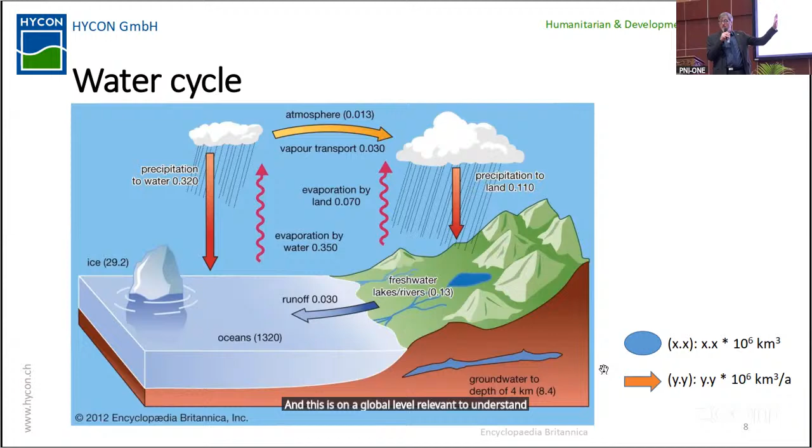Now, talking of climate change, I just want to give you an example from Switzerland, to show you the relevance of climate change on river runoff, and therefore the consequences for hydropower or hydroelectric production. What you see here are potential climate change scenarios on the temperature, depending on which model you take. And you see how the curves go up in relation to the CO2 emission equivalents, and the temperature change depending on the model.

So from models with an increase of temperature of 1.5 degrees Celsius up to 4 degrees Celsius on a global level. These are the different climate change scenarios which we have. Next slide.

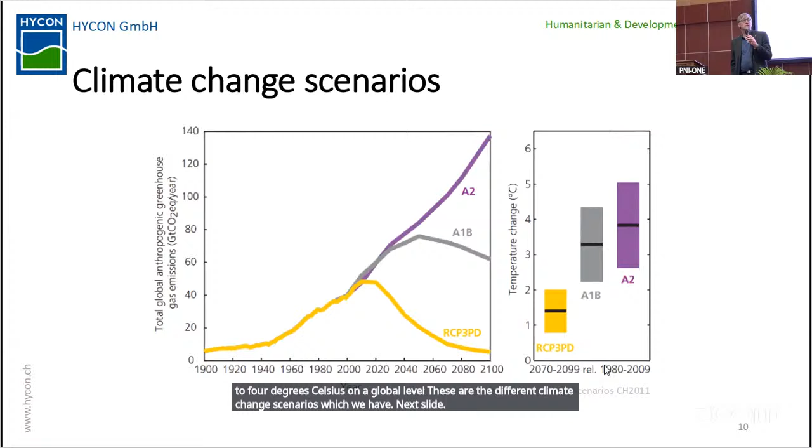And this is what happens with the river runoff. What you see here is the thick black line. This is a normal river runoff in Switzerland. Normally we have a low runoff in winter, January, February, and also towards the end of the year, and a high runoff in summer. Now, what happens when climate change comes into play? We will need to assume a shift where we have much drier summers. You see all the lines come down in the summertime. So we have drier summers and much more water in winter.

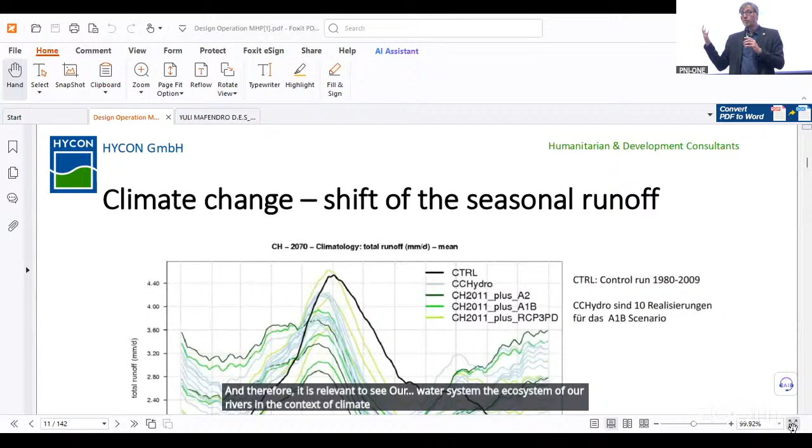Now, Switzerland has the challenge that we have cold winters and warm summers. Our farmers can only produce food in summertime; there are no crops in winter. So we have only the period from March, April to October to harvest our crops. And if we have much less water in summer due to climate change, we also have an irrigation problem because the water is not there anymore. So this is a real impact of climate change on river runoff. Therefore, it is relevant to look again at our water system, the ecosystem of our rivers, in the context of climate change, and to derive consequences for hydropower production. Next slide.

And these are the consequences for hydropower generation. We will have less water available in summer, so we can produce less hydroelectric power in summer because we have less water in the rivers. But we might have more water in the winter time in our rivers. And you see here the energy statistics for Switzerland. Switzerland has about 60% hydropower and 30% nuclear power, meaning that we might produce a little bit more hydroelectric power in winter, but definitely less in summer. Next slide.

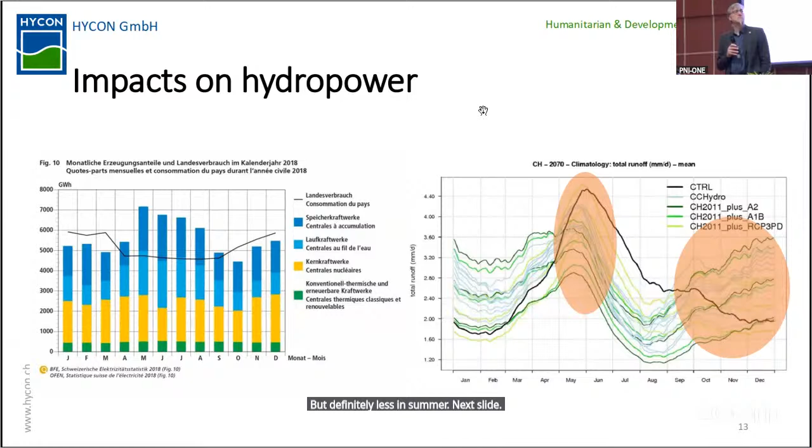Interesting, and I think this is also worth mentioning when I look on the transition to renewable energy, which is also one of the major goals for Indonesia. We always say that renewable energy, and I'm talking now mainly of solar and wind power, is fluctuating very much. So you never know, is there a lot of PV electricity, or is there a lot of wind, or is there less?

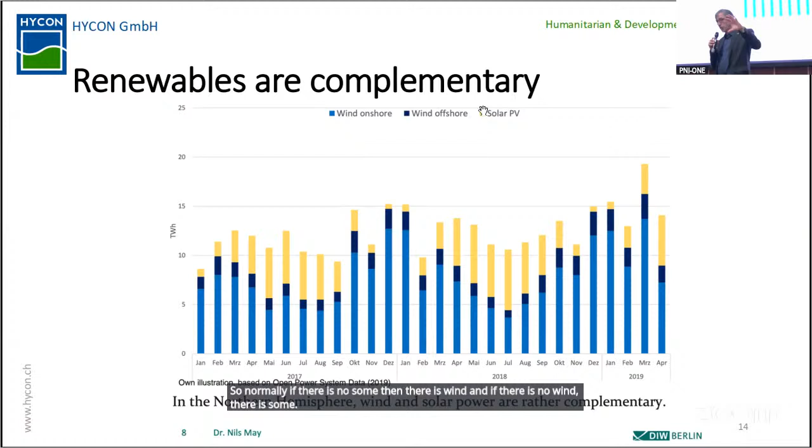A German institute has made a long-term study, and what you see is that solar and wind are actually complementary. So normally if there is no sun, then there is wind, and if there is no wind, then there is sun. So if you look on a long-term average, you see that you have, with the combination of solar and wind, more or less a constant yield of renewable energy. Next slide.

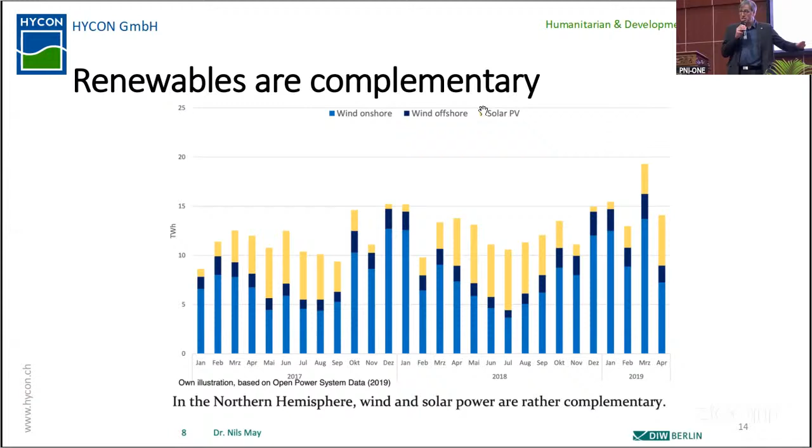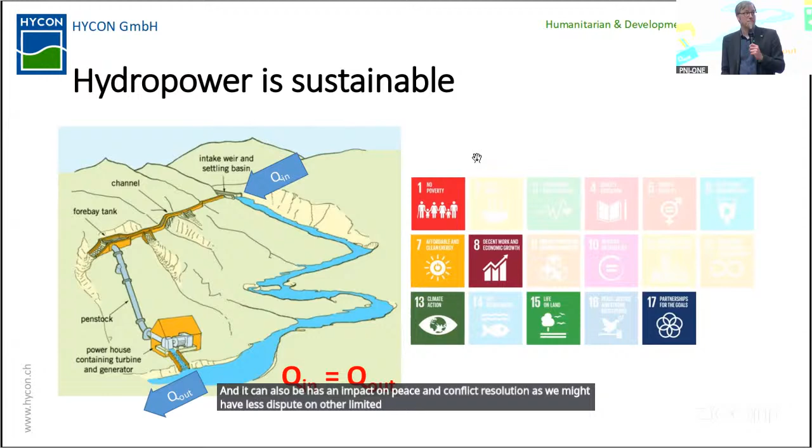As it helps further in transitioning to renewable energy, we definitely have a positive impact on climate change. We have a positive impact on life on land. And it can also have an impact on peace and conflict resolution, as we might have fewer disputes over other limited resources. Next slide. Next.

Further, we need to purchase equipment and materials. And let me add that here in Indonesia, we have a very vibrant sector for renewable energy, for hydropower plants. We have a lot of companies providing components for small hydropower plants, be it turbine manufacturers, be it electrical engineering companies, etc., who provide this equipment. So here we already have an industry in Indonesia which can provide the required components, and therefore by installing new hydropower plants, we can also benefit from our existing industry here without the need of importing goods or services from abroad.

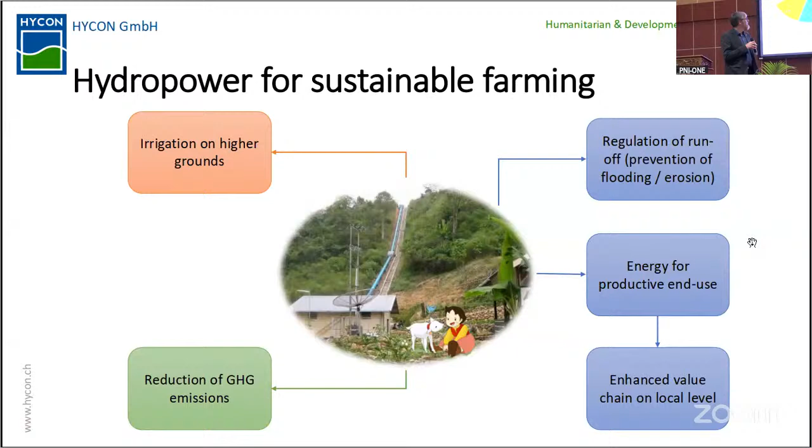And this is very interesting, actually. This is the value chain from farming, and you see that with electricity, this green box here somewhere on the left-hand side, this is key to many applications in the agricultural value chain in rural areas here in Indonesia. Next slide.

When we look on the rice, also, instead of just selling the raw rice, we can process the rice from drying, milling, and packaging, and then sell the ready processed rice. And therefore, we have a higher value creation in the rural areas. Same is with sugarcane, where we don't need to just sell the raw sugarcane to large companies, but we can generate income, additional income by processing it. Next slide.

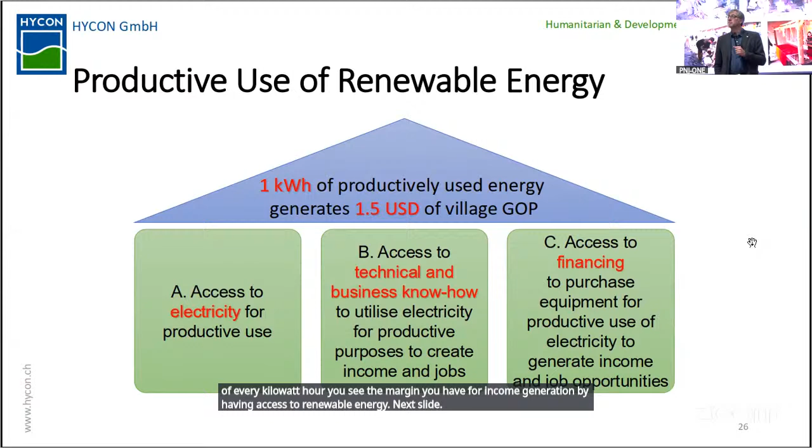So let's have a few slides on the design. This was now the first introduction on understanding the context of access to water, using water for hydropower, and the impact on a community. In the next few minutes, I would like to talk a few words on a design approach, and then we will do a quick break and the Q&A session, the first one. Next slide.

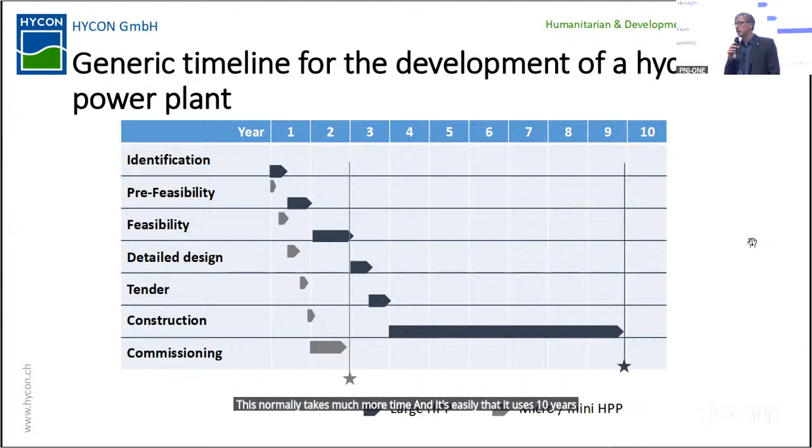This is just for your information here, an idea of how much time it takes. As you see, a small hydropower plant we can normally realize within 2 years. If you look at large dams, large hydropower projects, and you might have seen one or the other also in the media here in Indonesia, this normally takes much more time. It can easily take 10 years or more until a large hydropower plant becomes operational. Next.

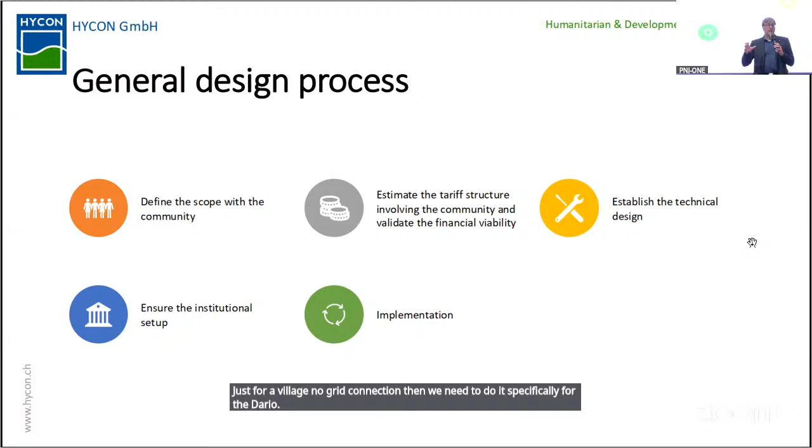So what is our general design process? Are we now talking only on the design? First of all, we need to define the scope. What is the idea of our hydropower plant? And here in Indonesia, this is very relevant. Is it a small hydropower plant somewhere in rural areas, just for a village, no grid connection? Then we need to do it specifically for that area. Is it grid connection? Are we becoming an independent power producer? This is a different scope, probably a bit more challenging due to the current regulation here. You can become an independent power producer, but there are some hurdles to take. So this scope is to be defined.

We need to have a clear picture on the economic situation. What are the potential tariffs? How much money can we create over the lifespan of a project? We need the technical design. I think this is clear, as we are all engineers. But then please look at the blue dot. That's the important one, the institutional setup. And that's where the sustainability is. A sustainable hydropower project is not coming just because we are good engineers and make a nice design.

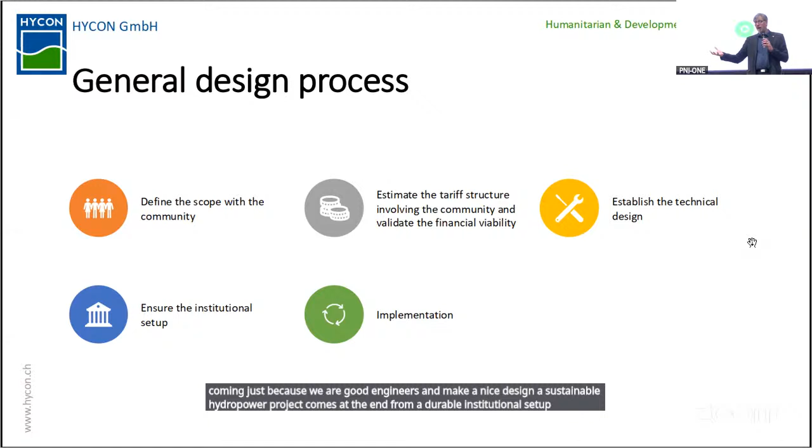A sustainable hydropower project comes at the end from a durable institutional setup, so that if we have a hydropower plant, we have a committee taking care of its operation. We have people collecting tariffs. We have the consumers willing to pay tariffs for it. And then we have also the savings in a bank or whatever, so that we can invest in the future in rehabilitating and replacing equipment. So that's actually the key part. Next slide.

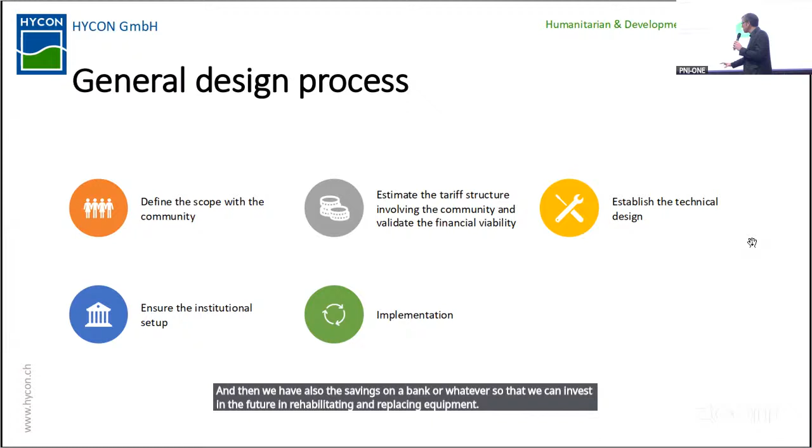As mentioned earlier, we shall not forget that there are also social impacts of a hydropower plant. So we even need people from social sciences to successfully implement a hydropower plant, because we need to have the community, we need to have an ownership within the community, we need to have a community to be able to pay for the tariffs. So you see, we have these socioeconomic factors which shall not be forgotten. Next.

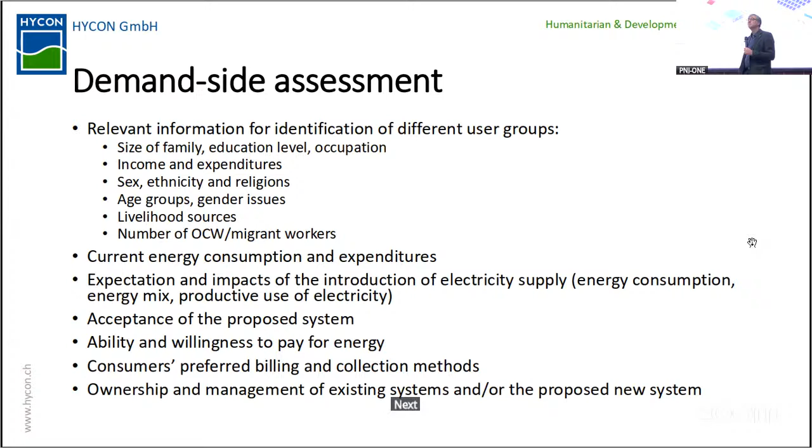For a hydropower plant, we cannot build a hydropower plant in every household, so we automatically have a mini grid, and therefore we need to have a proper mini grid design as well. Next slide.

As mentioned, with the mini grids, we in addition have two options. Either we have an isolated grid, and there we need to make sure that our hydropower plant also has a black start capability so that it can start up without any external sources, or we are connected to the national grid and just feed into the grid, or probably also can provide a backup in case of a blackout. Next.

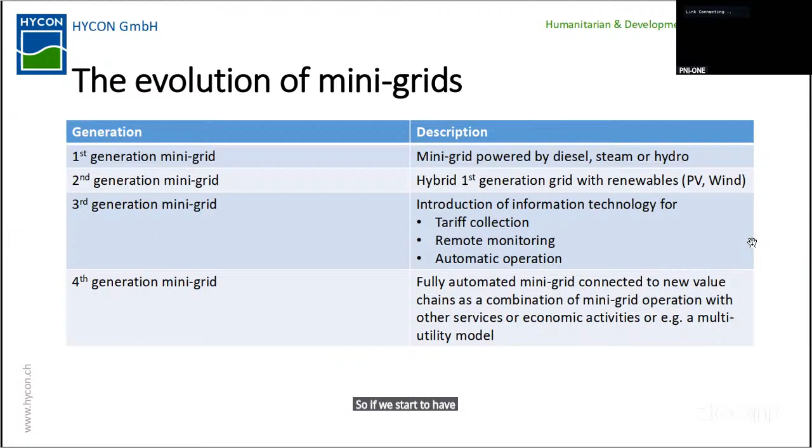The third and fourth generation is when we bring more data into it. If we start to have automatic metering and data collection on consumption, etc., we're in the third generation. The fourth generation is when we have a kind of fully digitalized mini grid in place.

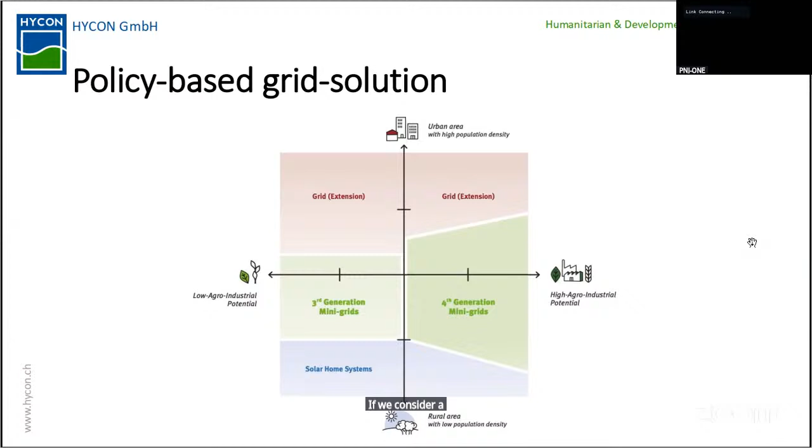This graph indicates a bit more the application. I would say in most cases these days, if we consider a mini grid, a third generation mini grid is in many cases the best option here in rural areas in Indonesia and elsewhere. As for fourth generation mini grids, we have a much higher investment. We also need to remember that with a mini grid we can generate jobs for operators, etc., and in a fourth generation mini grid we again need fewer people to operate it.

Yeah, these are the barriers I already spoke about. Regulations can be a barrier for successful mini-grid implementation, but also the tariff model - if it's not economically viable, you won't find any investor for a mini-grid, and your project will never come to fly.

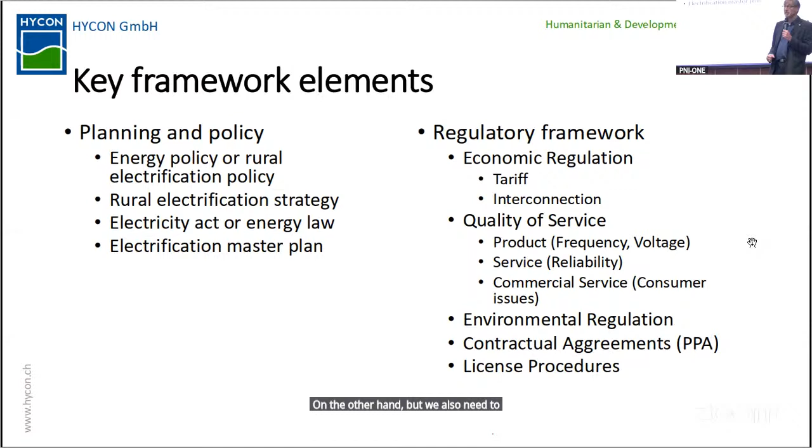On the other hand, we also need to protect our clients, and therefore we need regulations in place - regulation on quality of service, regulation on applicable tariffs, so that a community isn't just depending on an investor who dictates the tariffs. So we need good regulation in place. Thirdly, also on environmental issues, and on licenses and contractual agreements. It would be wrong to say we need to deregulate everything. We need regulations in place, but regulations set at a specific aim, all based on applicable policy.

Here in Indonesia, the utility is very much investing in expanding the national grid, meaning that the areas for independent off-grid mini-grids become less and less, which is based on national policy, which is a good thing. So here probably we need to look more into either very remote areas or grid-connected hydropower plants.

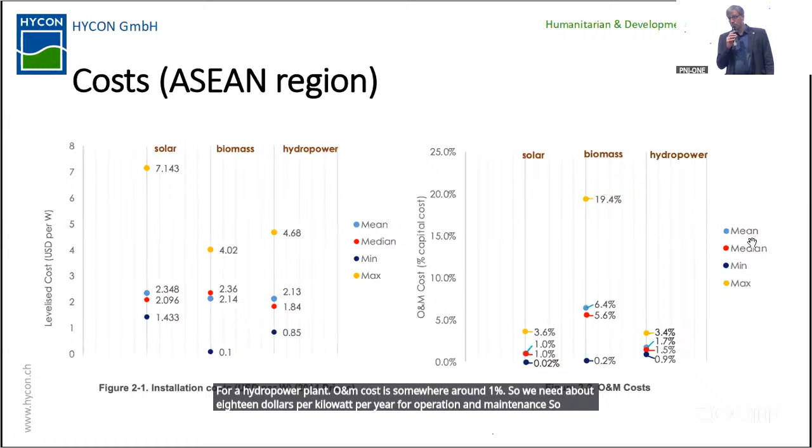Next slide. So if you agree, I would say we make a quick Q&A round and a quick break probably afterwards, and then we go more into technical details.

Silakan angkat tangan boleh? Oke, dari Pak Idrus boleh, silakan Pak. Ya, silakan Pak, pakai bahasa Indonesia boleh. Okay, in English. My name is Idrus Asgaf, I am from heavy equipment major.

I have strong interest in micro hydropower system, and I would like to inquire about how to address water shortages that may occur during the dry season.

Yeah, good question. Maybe you will answer it first, directly answer. During the dry season, how do you manage the... Well, dry season is very challenging for hydropower because there is not much water available.

That helps you to remember it. I will come back to that later. Why is this equation relevant? This equation is relevant when it comes to selection of the penstock, the pipe of our hydropower plant, because the smaller we make our penstock, the higher the velocity is. And the higher the velocity is, the higher losses we have in the penstock. I will come to that later.

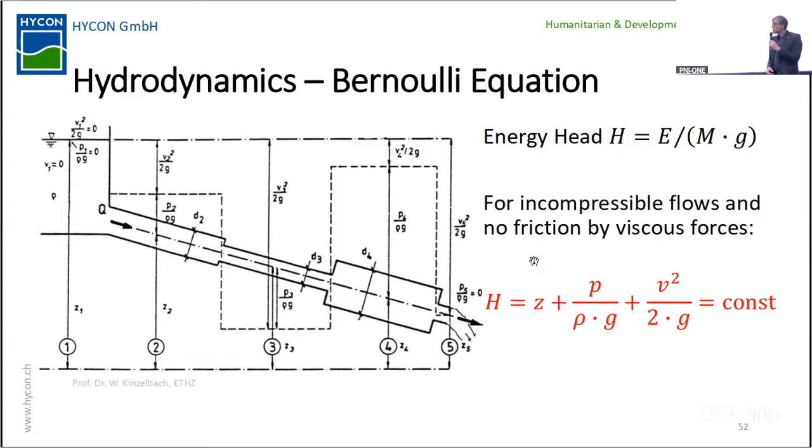Yeah. And if I say here we have losses, well, this energy is not lost, but there's just a part of originally potential energy, which is converted into thermal energy. These are the friction losses in our system. And that's nothing else than if you rub your hand, then you convert mechanical or kinetic energy into thermal energy. And that's the same what happens here in the system. So, but the total amount of energy is always constant. It's just a question of how it is distributed on the different fractions.

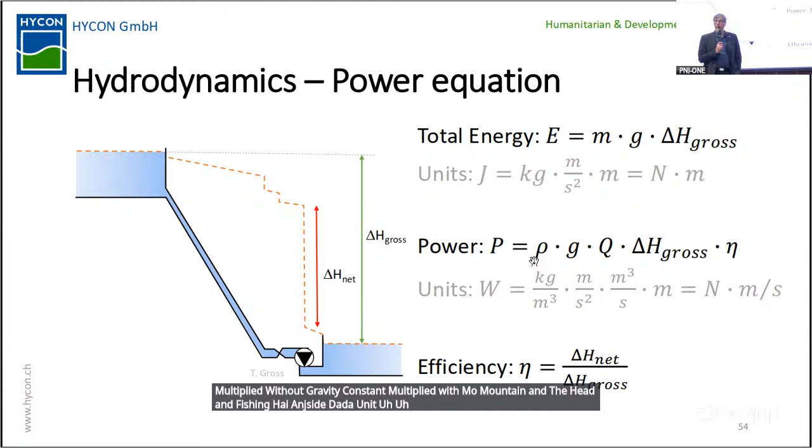Oh, what happened to that slide? Oh, sorry, there we have a layout problem, but it's the same formula.

So again, here our power formula is that the power is equal to flow multiplied with the head, the density, and the gravity. And if we simplify our lives and assume that water has a density of 1,000 kilograms per cubic meter, we can even eliminate our density component and then just use the short form version, and then we have the power in kilowatts. This is definitely the most important formula to remember. P, the power, is equal to the product of the flow, the head, the density, gravity factor.

What else do we have? G and the efficiency and the head. So that's a formula you really need to remember if you talk hydropower. This is a formula you should know by heart. If you understood this slide, then you understood hydropower. Next slide.

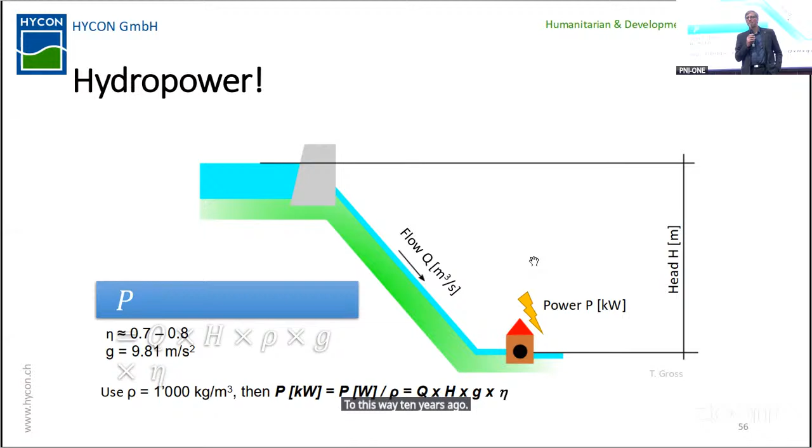So we're now coming a bit more into technical details, as we have a lot of engineers here. We're not talking socioeconomics. So, penstock, and I showed you the continuity equation. Now let's have a bit closer look at the pipe. Next slide, please.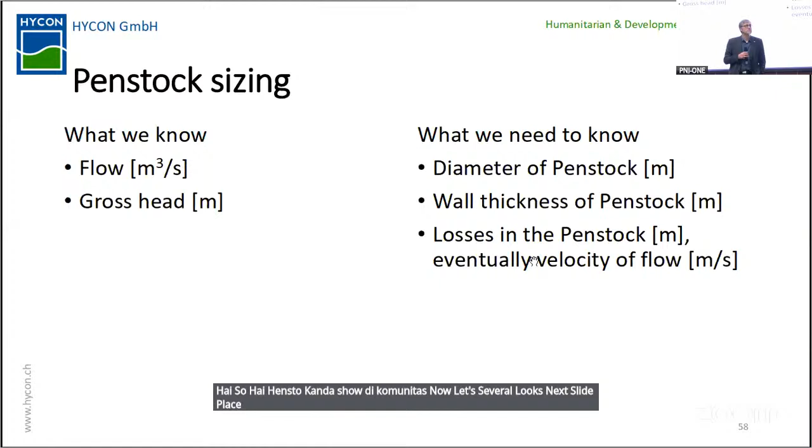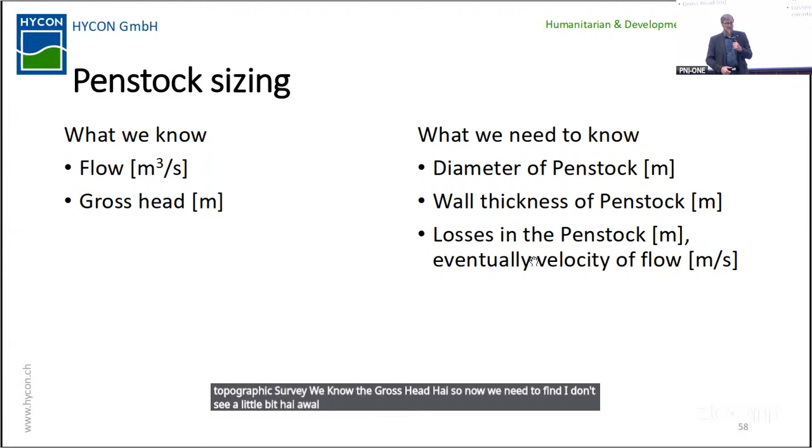Normally, when we need to do a penstock sizing to find out how big this pipe needs to be, how do we define this pipe? Normally, we know what our flow is because we did a hydrological assessment and we made an assumption of how much water is available for a hydropower plant. This is somehow given. And from the topographic survey, we know the gross head. So now we need to find the diameter, the wall thickness, the specifications of our penstock. Next slide.

A very easy way to determine a potential size of our penstock is graphically. So you see here a potential chart where we have our flow on the left-hand side. And this is for an area where we have only certain diameters available: 12-inch, 14-inch, 16-inch, whatever. So if you're in an area where you have only certain sizes of pipes, you can easily do it graphically like this and say, okay, I have 600 liters, I have this 18.8-inch pipe available, so therefore I'm somewhere around 3.3 meters per second. Next slide.

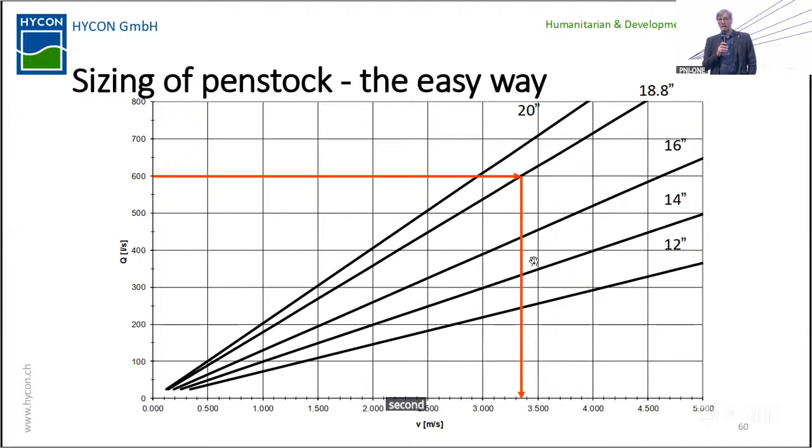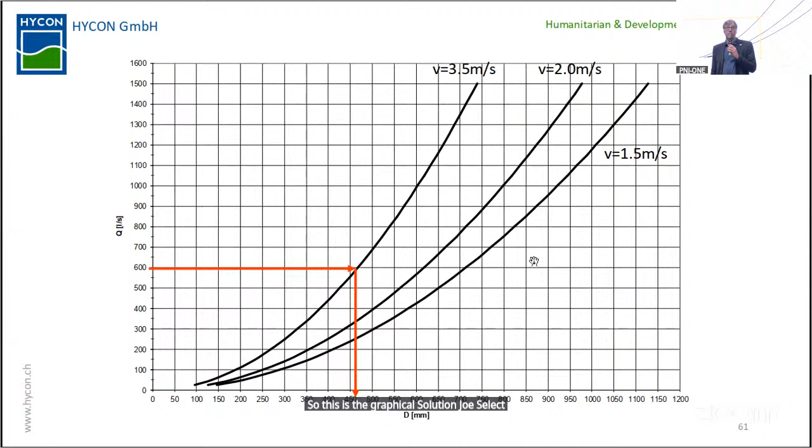We can also do it the other way around, that we say, okay, we accept 3.5 meters per second. We have our 600 liters again. Therefore, we need something around 45 centimeters of diameter for our penstock. So this is a graphical solution to select the proper penstock. Next slide.

Now, once we selected our pipe, we need to calculate the losses. And if you get my message here, please, we need to remember that the losses always go by the square of the velocity. So you can imagine if we double the velocity, if we use 4 meters per second instead of 2 meters per second, then the losses will go up by a factor of 4.

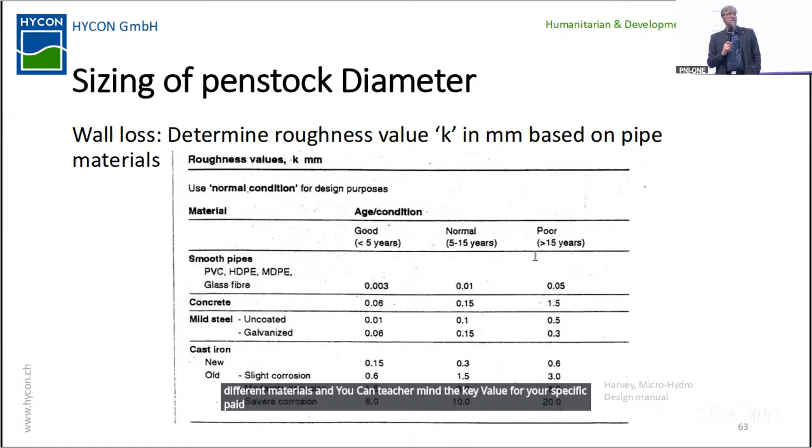Now, for sizing our penstock, we first need to determine the roughness of our pipe. As mentioned, it depends on the material. If you have an old corrugated steel pipe, you have a much higher roughness and therefore higher losses than with a nice HDPE pipe, which is very smooth and has less losses. So there are tables for different materials, and you can determine the K value for your specific pipe. Next slide. And please click two more times. Thanks. Okay. So how are we doing it?

Now, this is the so-called Moody diagram, and this you need to calculate the losses. First of all, on the bottom axis, as you see, this is 1.2 multiplied by the flow divided by the diameter. This is a simplified Moody diagram. There is the more scientific version available, and then you would have the so-called Reynolds figure on the horizontal axis. So for those who already had some lectures on hydraulics, if you know the Reynolds figure, that's literally the representation on the horizontal axis.

Then you see these curves. These indicate the fraction of the roughness value divided by the diameter. You see here again this K value, that's what we need. From the Reynolds figure, we go vertically up to our curve with the relevant value, and then we go over horizontally to find our friction factor for the specific pipe. And here on the vertical axis, that's your value for F, as you saw in the previous slide. Next slide.

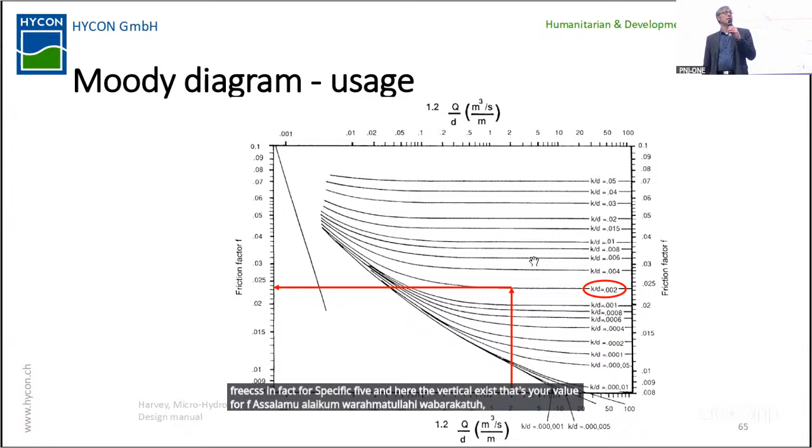Here you just see the comparison. On the left-hand side, you have the simplified version. On the right-hand side, you have a graph with the Reynolds figure on the bottom. But the results at the end are the same. Next. This is just for those who want the more scientific version. I'm not going into details. Next slide.

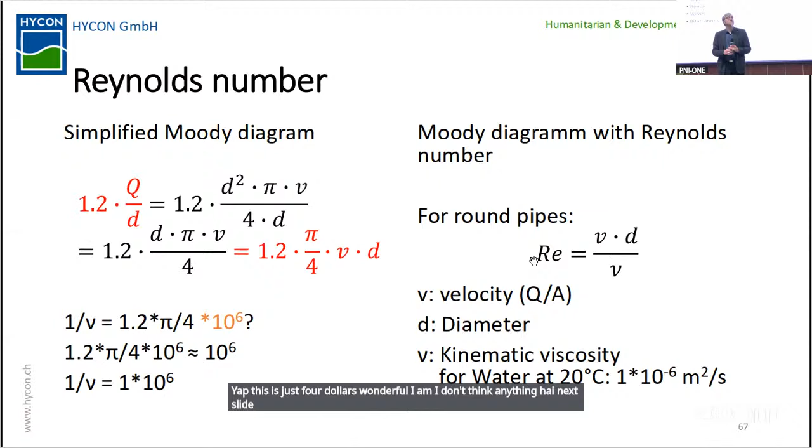So turbulence losses. As I said, we had the continuous losses, and then we have turbulence losses in different elements in our penstock, be it a bend, a valve, whatever. And we quickly look at those as well. Next slide.

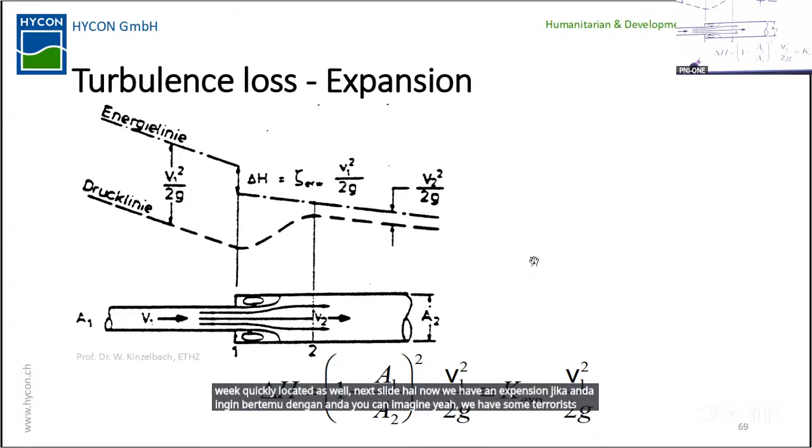Now, if we have an expansion, we have a small pipe and suddenly go into a big pipe, you can imagine that we have some turbulences where it is expanding. And these turbulences create losses. These losses we can again calculate by the proportion between the two cross sections. And again, you see our famous term here, the square of the velocity divided by 2g. So again, the higher the velocity is, the higher the losses are in our pipe. Next slide.

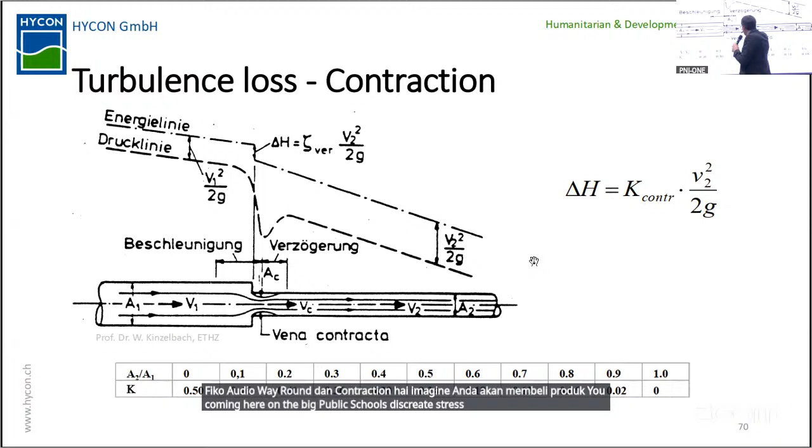If we go the other way around, the contraction. Imagine again you're the rubber duck. You're coming along the big pipe and suddenly you need to squeeze into the small pipe. This creates stress and therefore we have losses there as well. Next slide.

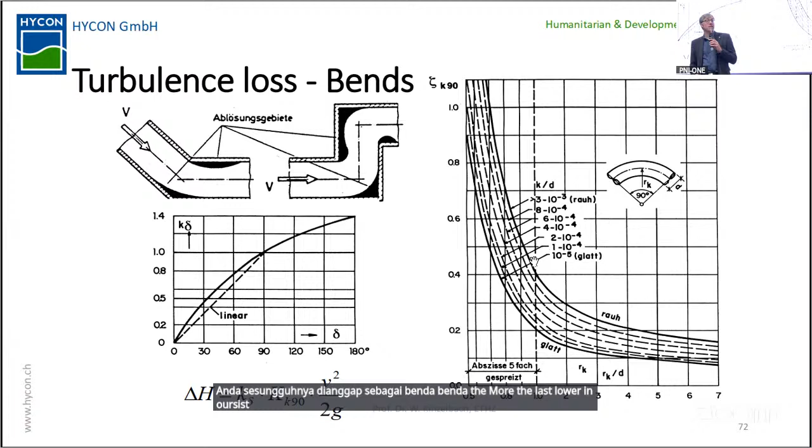Yeah, here's some more additional information. And you see how it evolves, the bigger the curve is. Next slide.

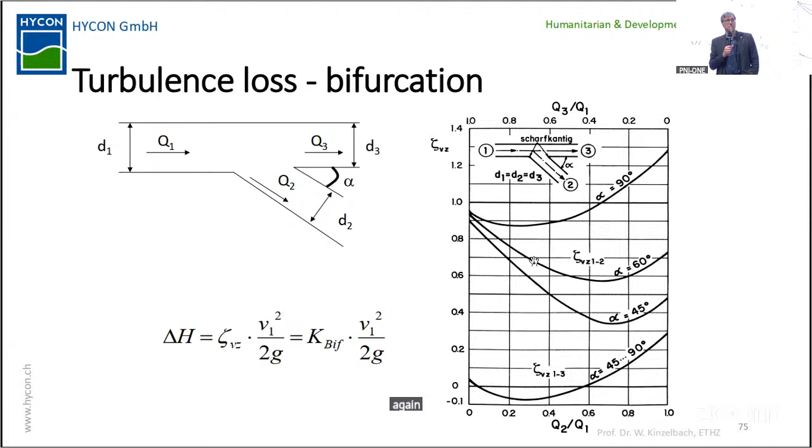Bifurcations are stress as well. You know it every morning when you're here in Jakarta in traffic. Always when two roads merge or go in different directions, there you have a traffic jam, and the same is in a pipe. So also in bifurcations, we have losses, and here again they go by the proportion between the two directions, and again with our term of the square of the velocity divided by 2g. Next slide.

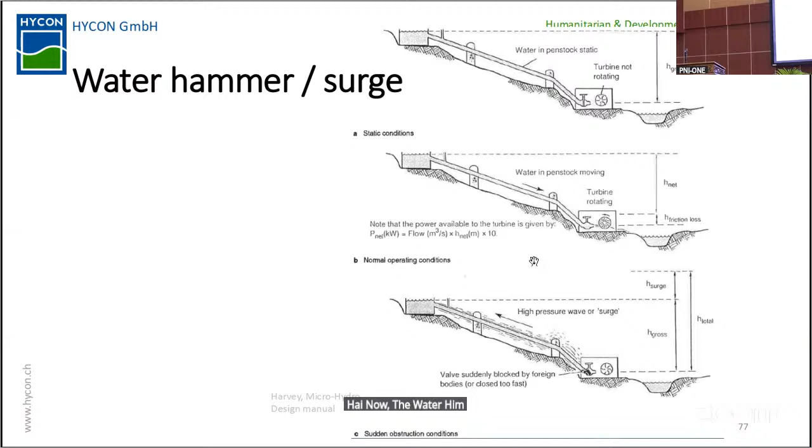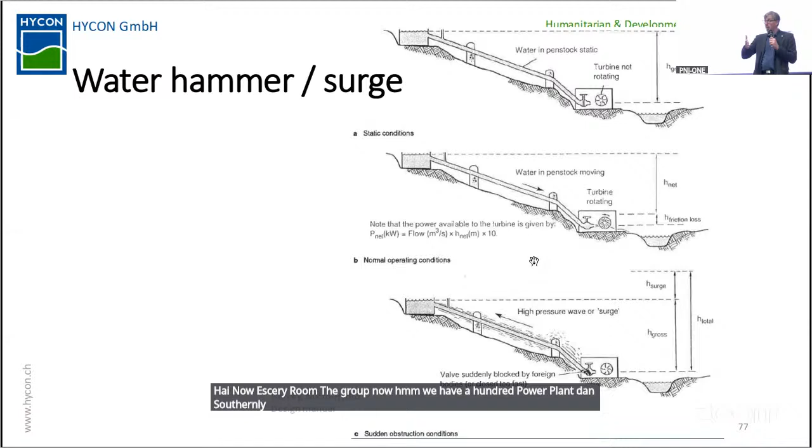Now the water hammer, this is an interesting phenomenon. And we also discussed it in multiple trainings which we provided here. And here it's less on how to calculate it, but more to understand the principle. Now, as you see here on the graph, imagine we have a hydropower plant and suddenly the turbine blocks, or suddenly the system is closed at the lower end. Now, what is happening? Just imagine you and all your colleagues as little rubber ducks are going into the pipe and suddenly there is a blockage next to the turbine.

No. Please go back one slide. Thanks.

So all the water is coming down to the turbine and suddenly it's blocked. And then we have a wave which is going backward because somehow this pressure needs to be released. More water is flowing in, and then you have kind of a backward wave up to the intake. And this is what we call the water hammer. And this we somehow need to be able to release. And that's what you see on the third picture. This is really this wave going back, and this creates an additional pressure on the pipe.

So we don't have only the hydrostatic pressure as you see on the top image, but we have an additional pressure from this backward wave in the pipe, and our pipe needs to be designed in a manner that this water hammer is not making the pipe burst. Next slide.

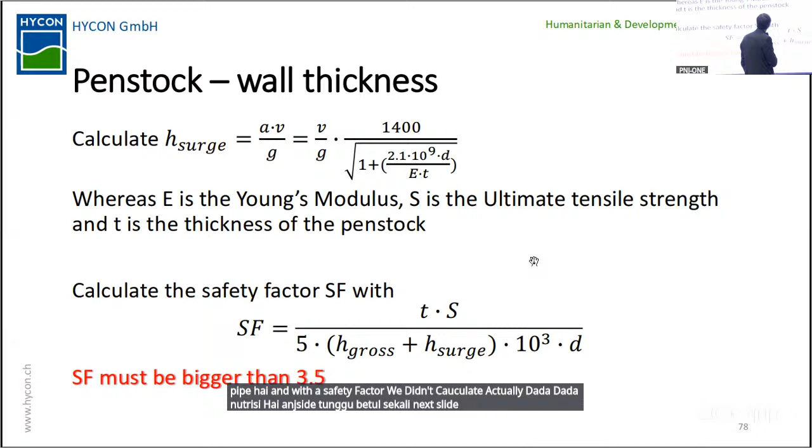So that was on the water hammer. For these formulas, you can create Excel spreadsheet files. The professors who had been in our trainings from RESD have received these Excel files. We distributed them in the trainings, so you can use them exactly.

Now, for some of you, it might be surprising, but if we look at a penstock, the pipe itself should be flexible. And this sounds probably strange for a massive steel pipe. But if I say it must be flexible, then I mean it must be flexible in a longitudinal direction. Why do we need this?

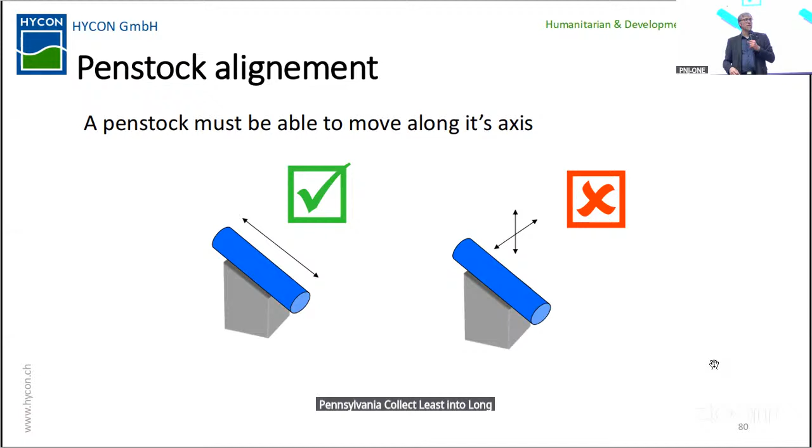Just imagine the power plant is turned off and the nice bright sun from Indonesia shines on that pipe. The pipe becomes hot, and suddenly we bring cold water because we put it back into operation. This cold water in the pipe creates stress for the material, and that's probably more for the mechanical engineers. Even iron can expand or contract a little bit. This expansion and contraction we need to adapt in our design, and therefore the penstock should be flexible, at least in the longitudinal direction, so that we can compensate this contraction and expansion due to changes in temperature.

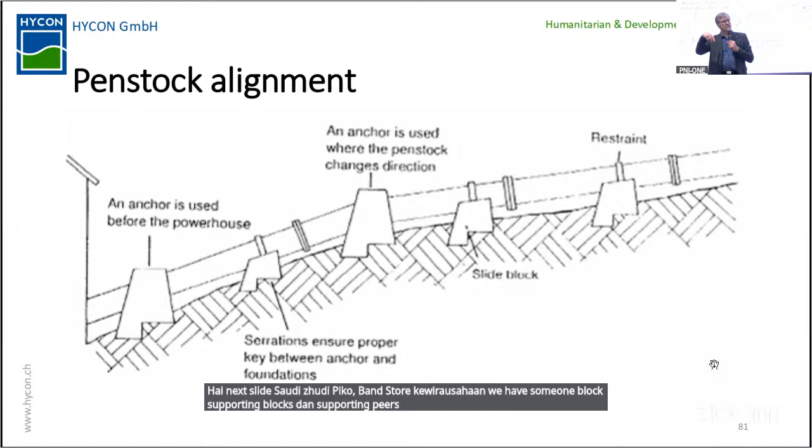Next slide. So this is a typical penstock alignment, and you see here we have some supporting blocks or supporting piers where the penstock is just placed on top. And we have some anchor blocks which really hold the penstock in position. If you look at this graph, you think, but just before he said the penstock needs to be able to adjust to contraction and expansion, and now we place it fixed into concrete blocks.

Then you need elements between the concrete blocks, the so-called expansion joints. An expansion joint is specifically an element in the penstock which can compensate for contraction and expansion of our penstock. So if we have one anchor block here and one anchor block here and the pipe in between, we need to make sure that we have an expansion joint between these anchor blocks so that our pipe can expand or shrink a little bit. Next slide.

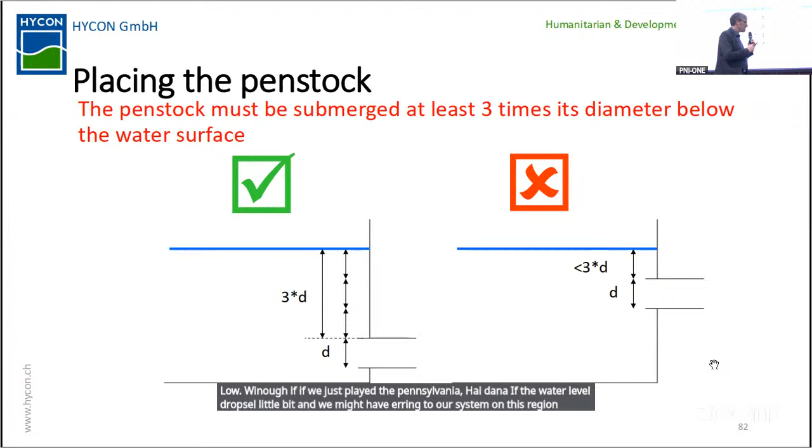Now, finally, the penstock at the top comes into a forebay, and there it is important to place it low enough. If we place the penstock as you see here on the right-hand side, then if the water level drops a little bit, we might get air into our system, and this reduces the efficiency. So whenever you design a forebay and the connection of the penstock, make sure that the penstock is covered by water at least 3 times its diameter. Next slide.

So we have our penstock, and the penstock and then the turbine, that's a closed system. Now, after the intake and before the penstock, we have water, but probably more water than fits into our penstock. How do we get rid of that water? For this, we have spillways. Spillways are a very important safety feature in our hydropower plant, and we can calculate them with that formula. I come to that formula in a minute. Next slide.

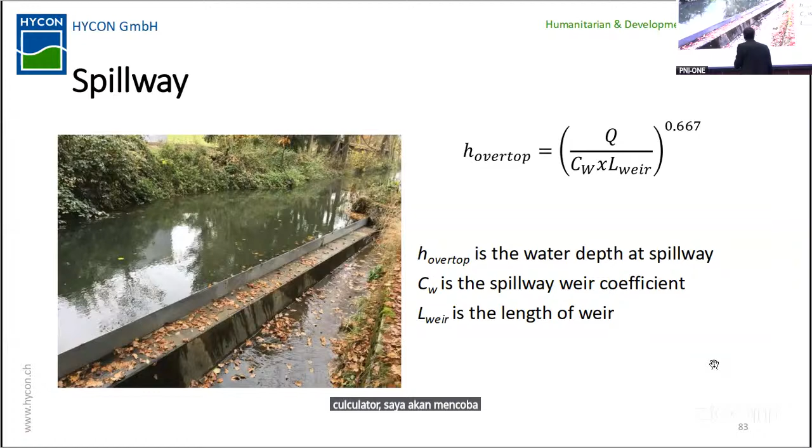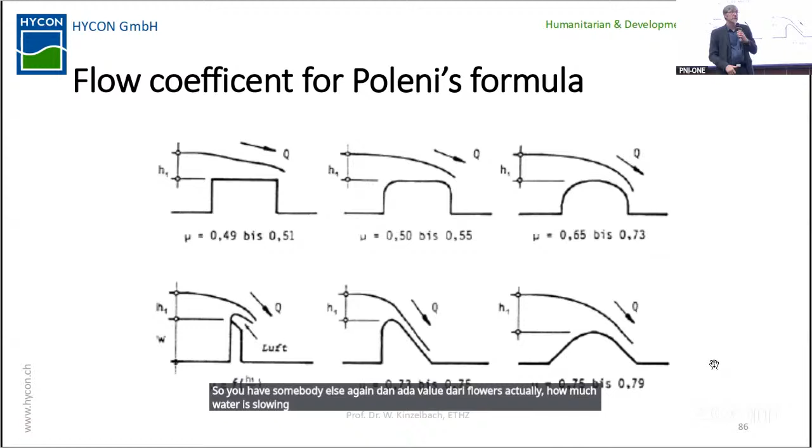So here you have some values again for this flow coefficient. And the value Q, the flow, is how much water is flowing over the weir. Next slide. So sometimes in engineering you have a rule of thumb, a simplified formula, and you have the full-fledged formula derived from science. And here you have the comparison between the two formulas. Next slide. Here's the same. Okay, next slide.

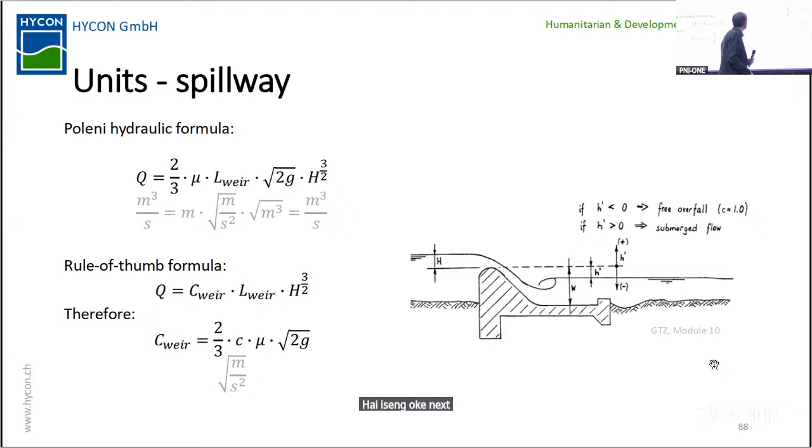Now, a spillway, as mentioned, and you saw it in the formula, the amount of water flowing over a weir also depends on the length of the weir or spillway. And you can imagine we have only limited space for how much water can overflow a weir. Imagine you have a channel, then probably your water can only rise by 10, 20 centimeters before it's overflowing everywhere.

So we need to make sure that if the water level rises, probably only by 10 centimeters, our spillway can evacuate all the water, which is too much, in a safe manner. And this might require then a very long spillway.

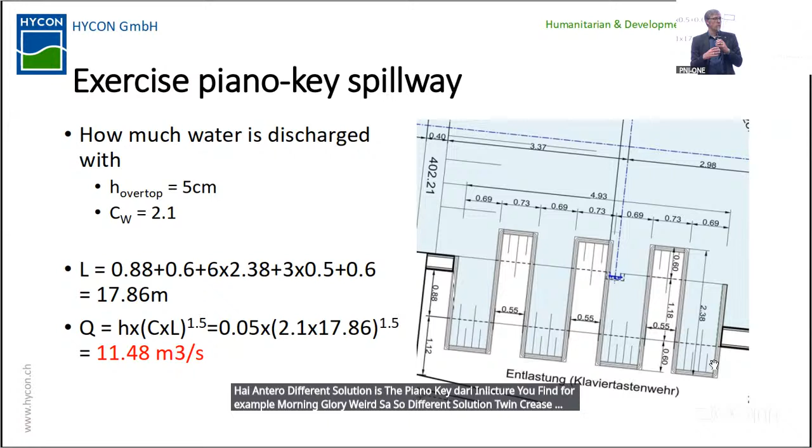And there are different solutions. This is a piano key weir. In literature, you find, for example, a morning glory weir, which is a nicely round shaped weir. So there are different solutions available in the literature if you have limited space to increase the length of your weir. Next slide.

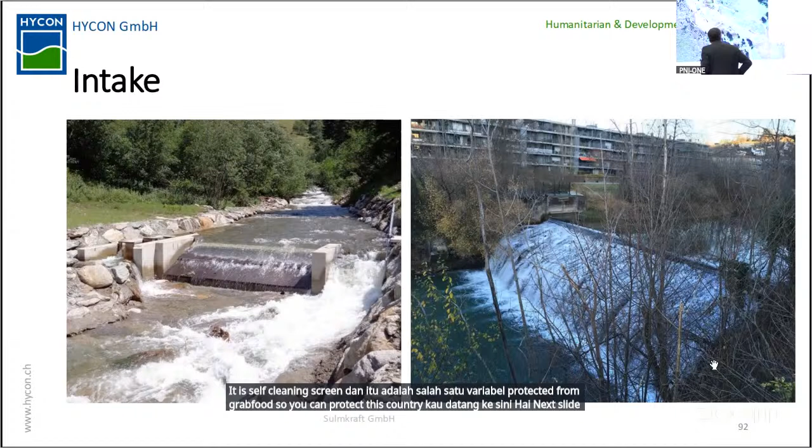Now, intakes. We should place intakes normally on the outside of a river bend. Why do we do it on the outside of the river bend? Because on the inside we have sedimentation, and then our intake just gets clogged with sand, with sediments, etc. And this requires much higher efforts to keep it clean. So if we do it on the outer side of the river bend, we somehow have a self-cleaning intake. Next slide.

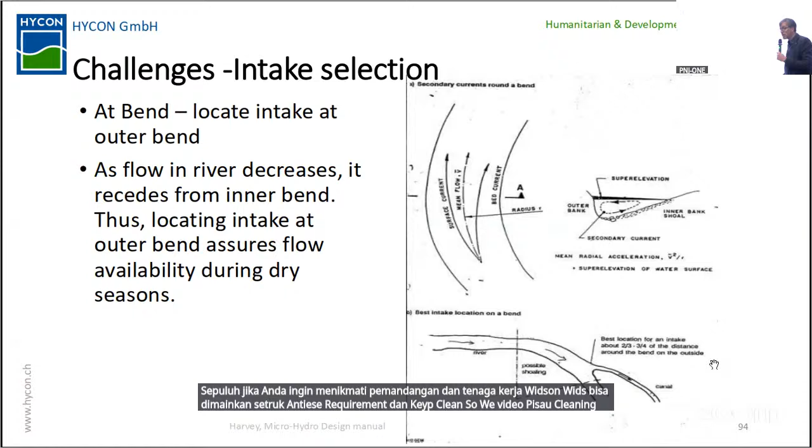We can protect our intake with boulders, etc. So this is really then depending on the location where you do it. But often you see what nature has provided you to protect your intake and to place it in a naturally logical location. Next.

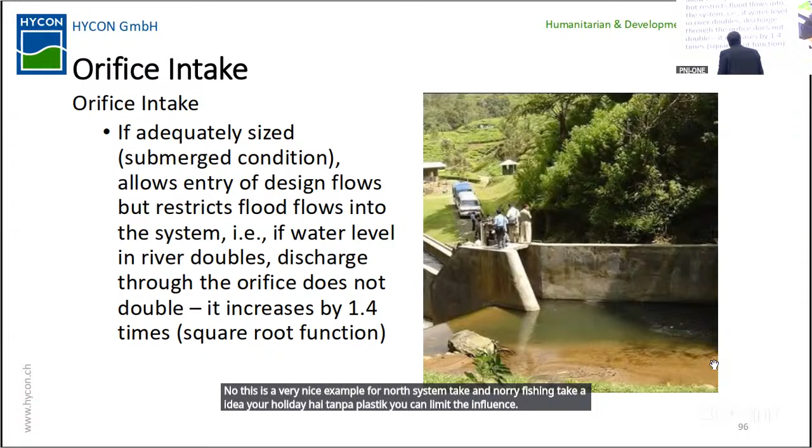Now, this is a very nice example of an orifice intake. And an orifice intake is the idea that your whole opening is underwater. And by placing it underwater, you can limit the inflow of the water. It's kind of a self-regulating system. Next slide. And that's what it looks like.

How do we do it? We know how much water we need for our hydropower plant because we did the hydrological assessment. We came to a design flow, and therefore we know what the flow is. We set an appropriate velocity for an intake here, somewhere 1 to 1.5 meters per second, and then we get the cross section of our opening.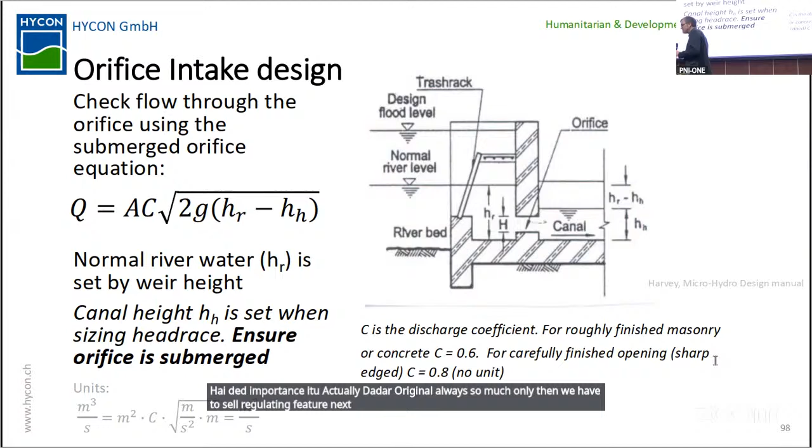So how we do our civil design of our intake: we first do it for normal condition, and then we do the same calculation again for flood condition. When we know in flood condition how much water we have in our hydropower system, we need to size the spillway accordingly. Next slide.

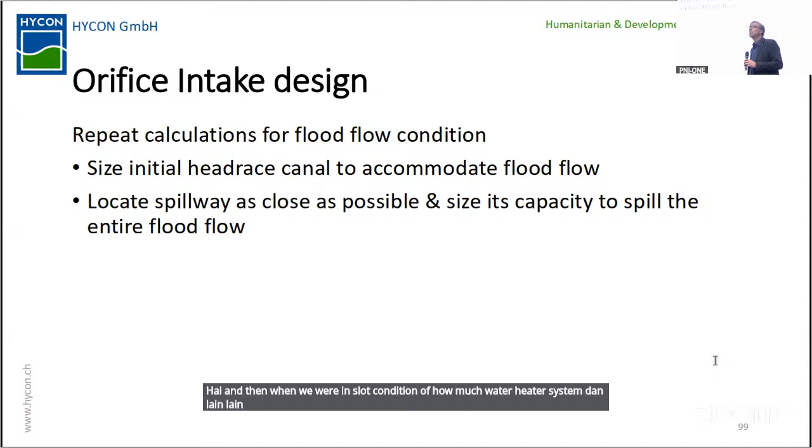That's literally the process how we do it. We define the intake opening, we check the flow, and then we repeat it for flood condition and calculate the spillways right after our intake. Next slide.

So I would like to give you an example because this sounds a bit theoretical, and let me walk you through a quick calculation example. This is an intake we built in Afghanistan, but hydraulics are everywhere the same.

So what you see here is the design cross-section of our channel, and we need to bring water into our system here. The design flow, which was given from the initial assessment, is about 1 cubic meter per second. Next slide.

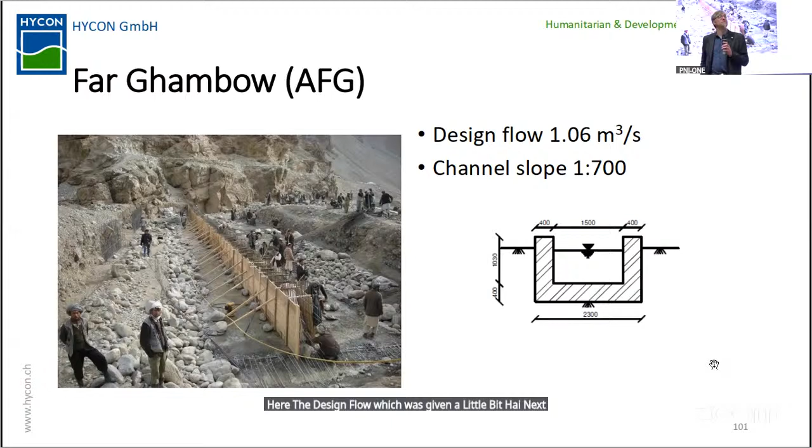So you see here, with our formula, I can calculate the cross section of our opening which I need. I have all the figures I need: I have our flow, 1 cubic meter, we have the water level as by design in the river, and we have the sizing of our channel, so we can calculate the opening.

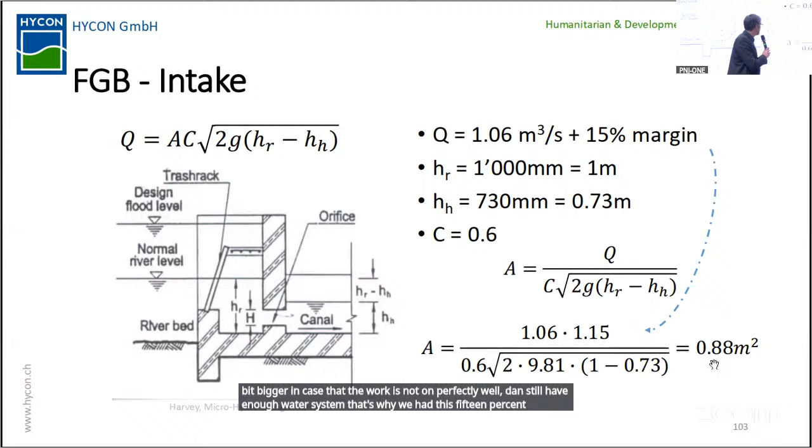What you see here, the engineer added a 15% margin, because as you can imagine, if you're in areas like rural Afghanistan, probably civil engineering works is not so accurate as it could be. So we need to have a certain margin, make the opening a little bit bigger in case the work is not done perfectly well, so that we still have enough water in our system. That's why we add this 15% margin. With this formula, we calculate that we have almost a square meter of cross-section required for our orifice intake. Next slide, please.

So we have the channel on the backside, as you see here from the cross-section, 1.8 meters wide. So it is a fair assumption that our orifice opening has the same width as the channel. With the cross-section we calculated, 0.88 square meter, we can then calculate the height of our opening. That means we need an opening of 50 centimeters high and 1.8 meters wide. Next slide.

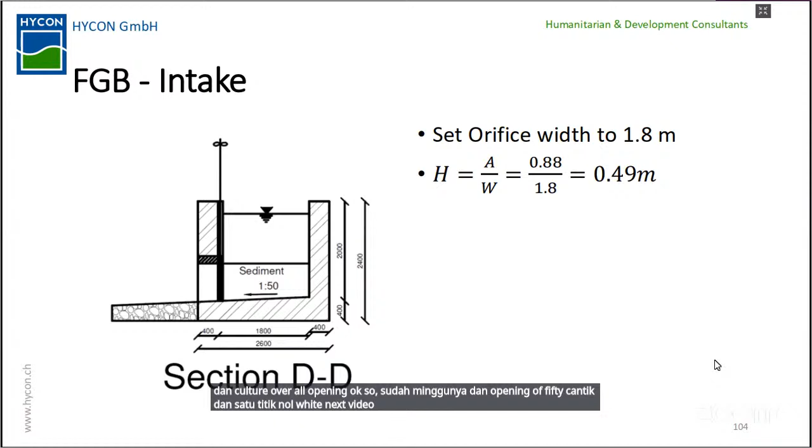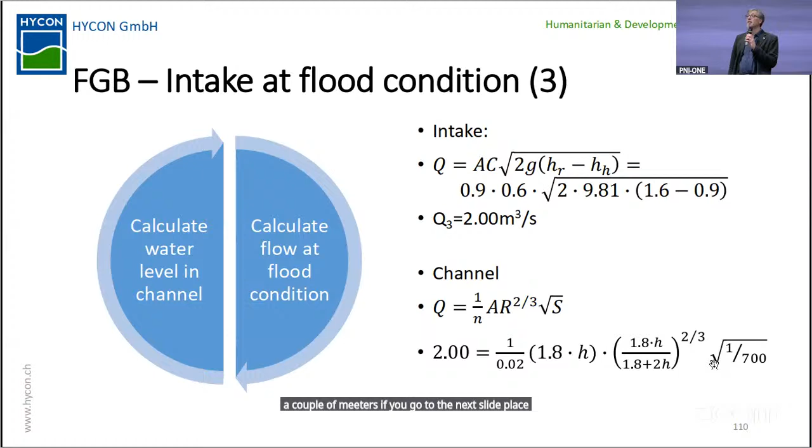And here with 2 cubic meters, the water level in the channel would be somewhere around 1 meter. Our first assumption brought us to 1.1 meter in the channel, the second result brought us to 90 centimeters, and the third iteration we are at the average of 1 meter. So it's a fair assumption after 3 iterations to stop here and say, in a flood condition with 1.6 meters in the river, we might have 1 meter in our channel.

Then we can do the final calculation, and we see that we will have about 1.85 to 1.9 cubic meters in flood condition in our channel. And therefore we can design our spillway, because we don't need 1.8 cubic meters for our hydropower plant, but only 1 cubic meter.

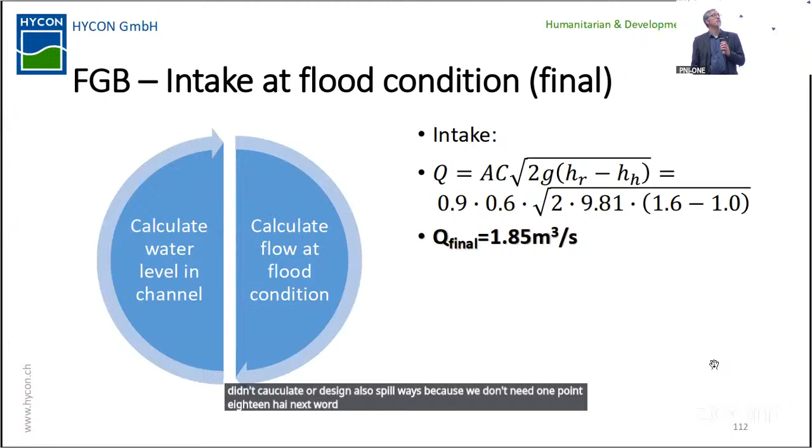That was the engineering part, and for the remaining few minutes, I think we have a few more minutes, 5 minutes, okay. So let's use these 5 minutes and talk economics. I don't know, do we have economic experts in this room? Any economic students? No one. Nobody cares about economics. Okay, so be happy if you get a salary without economics.

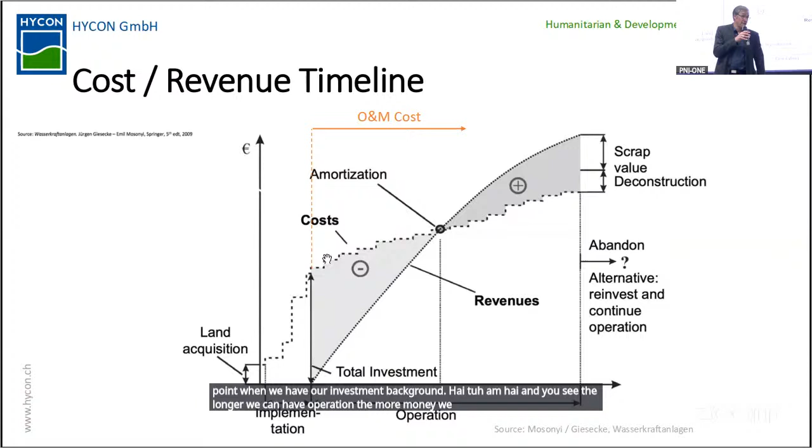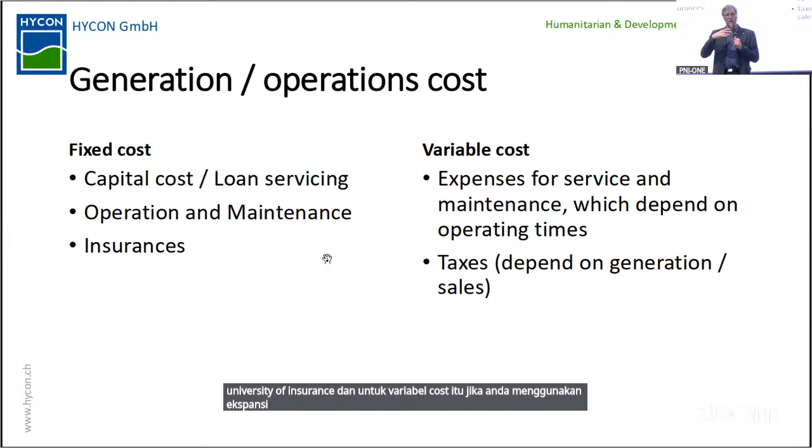On the OPEX side, you have fixed costs. If you needed a loan, you have your annual fees for the loan you need to pay. You have insurances, etc. And on the variable costs side, you have expenses for services, depending on whether you need a contractor or not. You need to pay taxes depending on your income, etc. So this is variable.

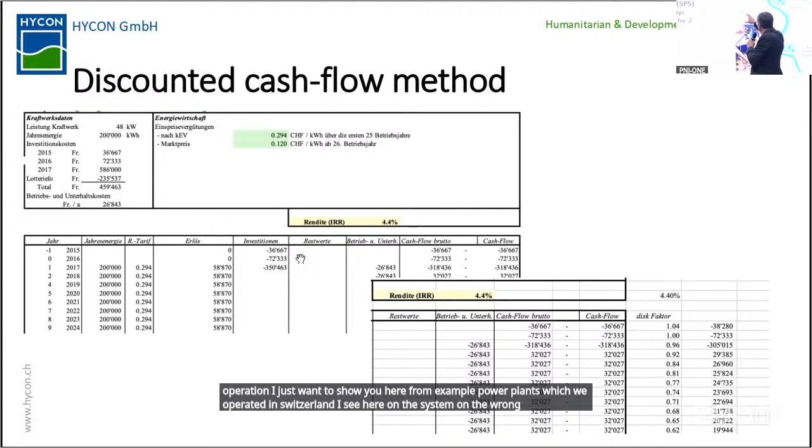These are the tariffs - it's about between 10 and 20 US dollar cents per kilowatt hour in Switzerland.

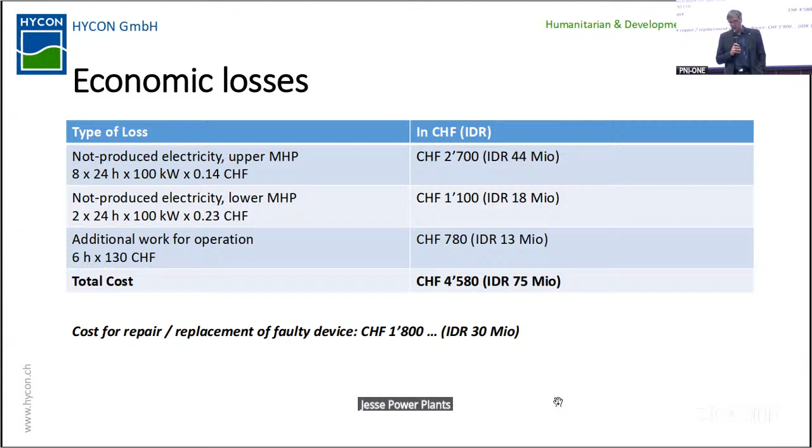Next slide, that's the calculation. You see, just because these power plants were down for about a week, we somehow lost about 5,000 US dollars - or at that time, you need to calculate it again, about 75 million rupees.

And actually, the maintenance cost, if we would have done it in time, would have been a fraction, you see. So people saved money on maintenance, and therefore we had a downtime in the power plant, and we lost much more money due to the downtime instead of replacing the components in time.

I think we just look at 2 more slides and then we come to a point, if you agree - operation key performance indicators. 2 more slides, I think, for hydropower operation.

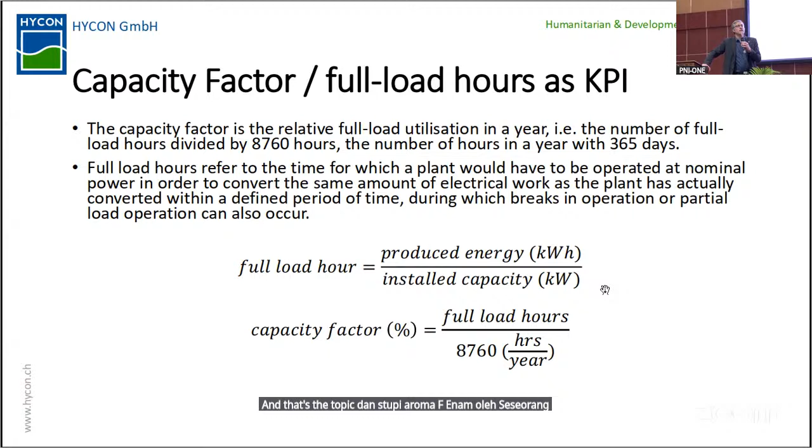So let's see what's on the next slide. Yeah, so we skip it here. There will be some more slides on how to do a root cause analysis if we have a technical problem, but I think in view of the hour, we close it here. I hope that I could give you some insights in design and operation of mini hydropower plants, and if you agree, we go to the second Q&A session.

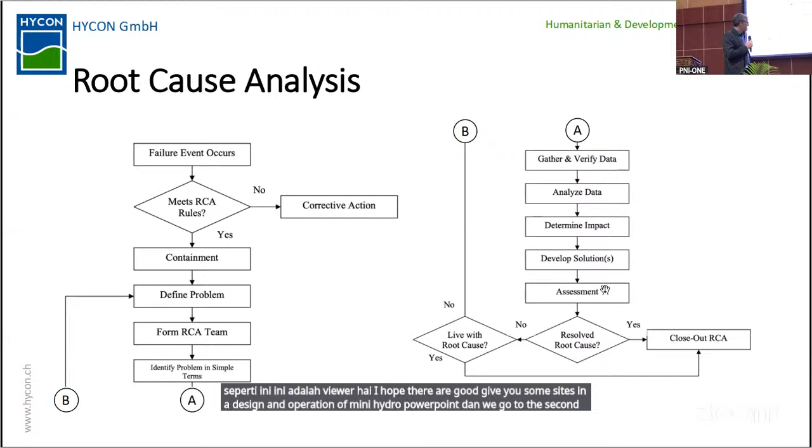We go Q&A. Any questions?